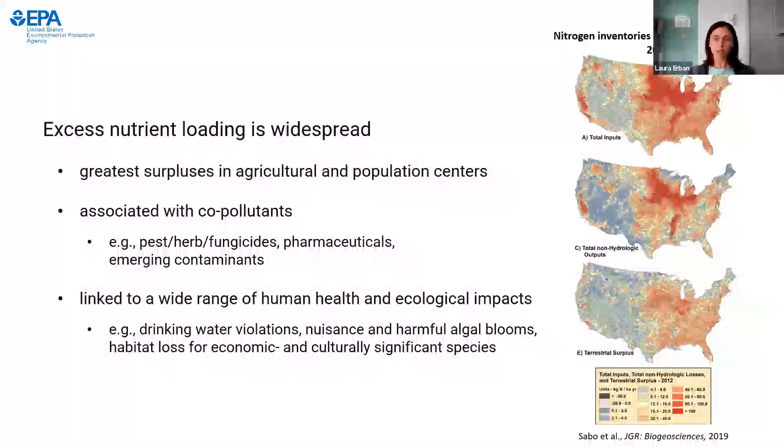And nitrogen alone, to say nothing of these other things, is linked to a wide range of human health and ecological impacts. So we have drinking water violations, nuisance and harmful algal blooms, and habitat loss over time for economic and culturally significant species. And nitrate in particular is a form of nitrogen that moves easily in groundwater. It's a regulated drinking water contaminant. We have a maximum contaminant level of 10 milligrams per liter nitrate as nitrogen.

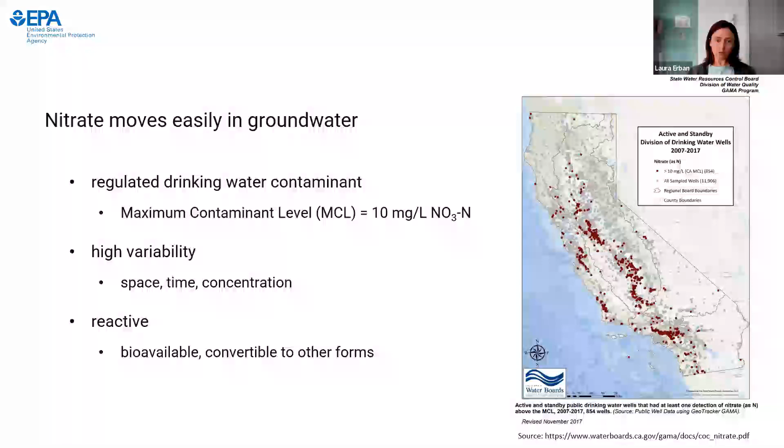And nitrate is a form that moves easily, if slowly, in groundwater to receptors. So from any given recharge area where we're applying nitrogen at the land surface, it is going to take days to more likely decades or even longer, centuries or millennia to discharge to streams, ponds, pumping wells, and the like, places that we would interact with it.

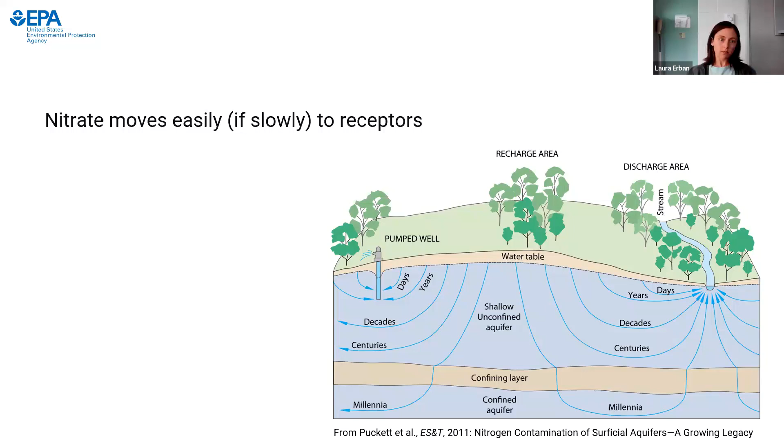And as a result of that slow leakage and also slow discharge through groundwater and also surface water and direct discharges, receiving waters become impaired by excess nutrients, along with other stressors that are contributing as well. And so we get these blooms of algae, that fertilization of the water bodies that reduces water clarity. It starves light to bottom species, including submerged aquatic vegetation. It basically overgrows, and it's unsightly, but in some cases also hazardous, where we have toxic algal blooms that can produce neuro and other toxins.

And in general, as these algal blooms die off, they also cause low dissolved oxygen events, fish kills, basically a wide range of impairments to water bodies that we want to use for a variety of reasons. So on Cape Cod, where we're working, and for those that aren't familiar, Cape Cod is on the eastern side of Massachusetts. From that national map you see here, it's the arm hanging off of Massachusetts. These waters are widely impaired by excess nutrients. And in this context, the overwhelming source is on-site wastewater treatment systems.

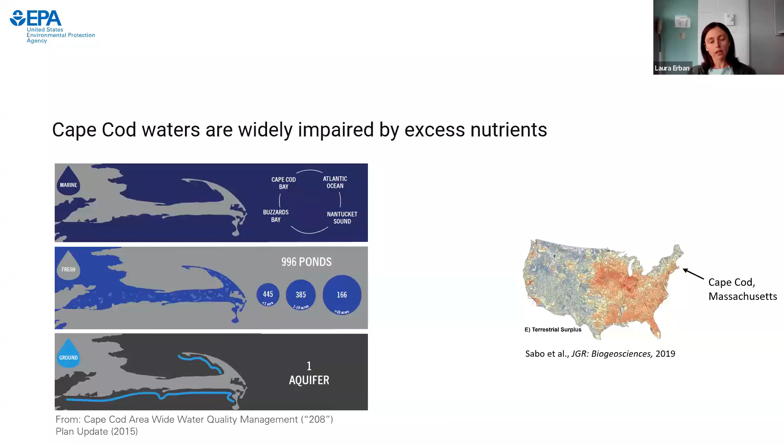And due to development density here, and it's a very popular place both year-round and particularly for the summer tourist season, those septic systems have contributed to widespread loading of a sole source aquifer, so the only source of drinking water supply, nearly 1,000 ponds and other water resources, including estuaries, so semi-enclosed saltwater embayments that don't flush very well, that receive this loading and become impaired by that chronic source.

And so on Cape Cod, there are now more than 30 estuaries with total maximum daily loads. This is a mechanism under the Clean Water Act Section 303(d) that allows for a determination of a pollution budget. So what is the pollutant of concern? In this case, it's nitrogen that's considered the limiting nutrient in estuaries. And what levels of loading would it take to sustain the ecosystem and the uses that we want to have for those water bodies.

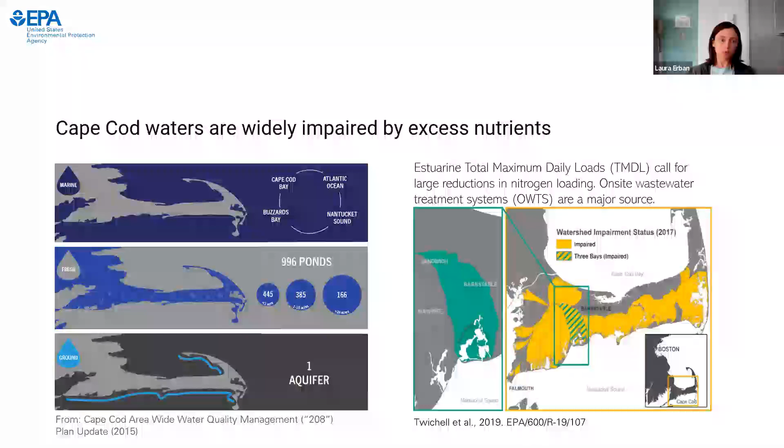And so these TMDLs specify load reductions, and they're generally speaking across the Cape saying about 80% of what we can control is from on-site wastewater treatment systems, and we need to knock that loading down Cape-wide by about 50%. But in some sub-watersheds, it's up to 100%. So we really need to reduce this loading. We've been working intensively in the 3 Bays watershed. That's sort of central Cape Cod. It's hatched in green here, working towards that TMDL.

And as specified under another section of the Clean Water Act, Section 208, there was area-wide water quality planning done Cape-wide to try to say, what are the ways that we can reduce this legacy and recurring nutrient loading? And so there's a lot of ways. This is showing you the tech matrix. So a range of things that we can do at different scales, things like extend sewers and provide some more centralized wastewater treatment, better septic systems, fertilizer management, land use planning and regulations. We can do things in water bodies through constructed wetlands or shellfish aquaculture or dredging and inlet widening.

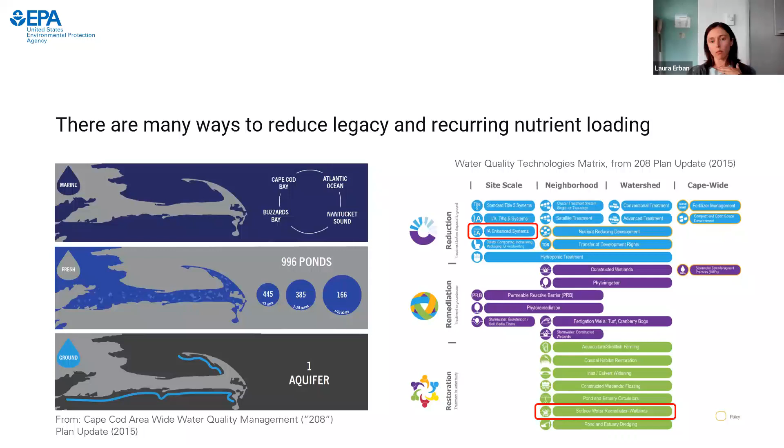There's the whole gamut of things that we can do to work on this from different angles, because that's what it's going to take at this point. And we determined that there were 2 particular areas that we could help move forward with that I'll be talking about today. So where did that come from?

We didn't come up with this research in the office, but went out to stakeholders and held a problem formulation workshop early on to say, what are the current needs and who can help us specify what the directions are to take at this time in terms of research and activities that we can work on in partnership. So through that stakeholder engagement process, we developed partnerships and projects. There are several threads to this work, but 2 that I'll speak about today are in the vein of enhancing on-site wastewater treatment and restoring cranberry farms to wetlands.

So zooming out for a moment to zoom back in, I want to paint a national portrait of on-site wastewater treatment, because the needs are much bigger than nitrogen removal. There's more than 1 in 5 US households using some form of on-site treatment and disposal. We last surveyed this nationally in 1990. There's greater reliance in the Northwest, Northeast, and Southeast. And as I said, it's a source of many different kinds of pollutants to groundwater.

There's a wide range of impacts for human and environmental health because of the variability in treatment technologies. We have in some areas just straight pipes running out to the backyard or a local creek. We have cesspools and cesspits that are more rudimentary, and then septic systems are an advancement, and beyond that, advanced or enhanced septic systems that can perform a higher level of treatment for nitrogen and potentially other things. But I just want to frame this as saying there's a wide range of things ranging from acute gastrointestinal concerns all the way to more chronic impairments that we see with nutrients.

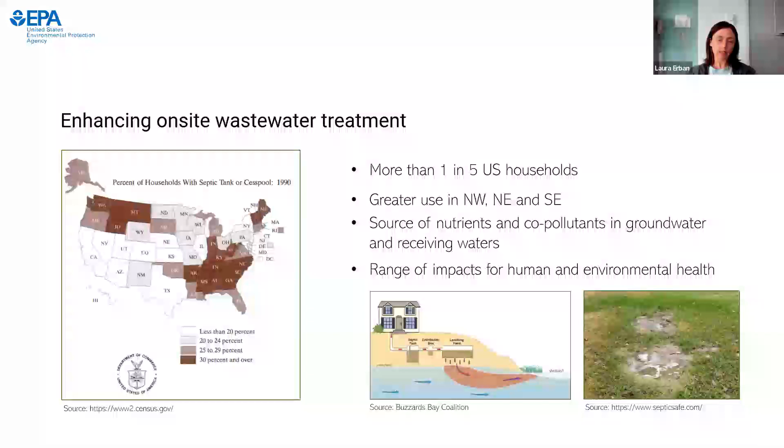So a conventional septic system, which is one of the more advanced in that spectrum I described, does a good job at settling solids and separating them in a septic tank, also fats, oils, and grease, but discharges liquid effluent to a soil treatment area or a leach field continuously. So there's a continuous wastewater flow path that's making its way to groundwater. And that flow path tends to be enriched in nitrate in that form that I mentioned before.

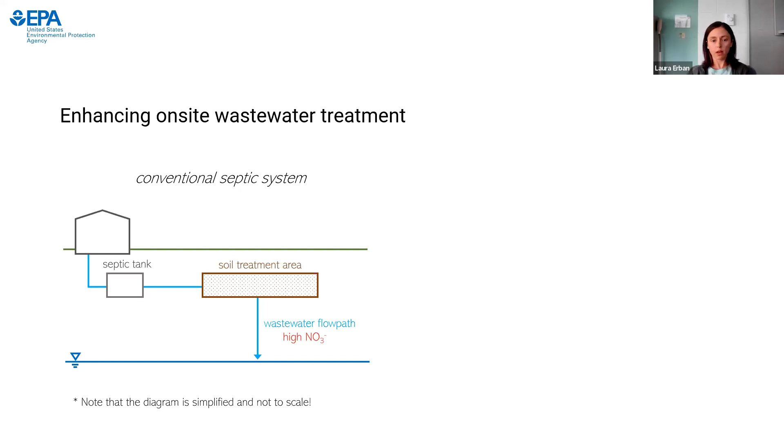And so the alternatives to discharging that nitrate to groundwater would be, broadly speaking, to separate waste streams. In particular toilet waste is where a lot of those nutrients are coming from. So we can do things like urine diversion, composting toilets, or tight tanks, which is just a tank that's not connected to a leach field. And we do see those types of alternatives in specific settings: our state beaches here, campgrounds, RVs, boats, seasonal homes, things of that nature. I won't be speaking more to these solutions, but I did want to highlight them.

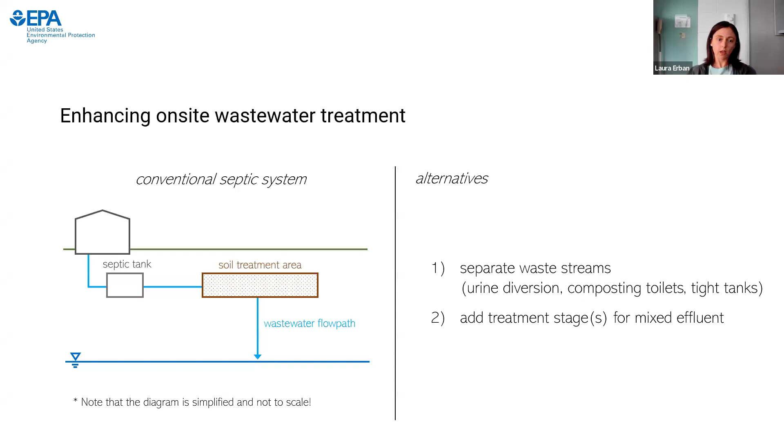The other alternative is to add a treatment stage for mixed effluent. So if you're not going to replumb your home, then what can we do to modify the down gradient treatment system? And in this case, that's because after leaving a conventional septic system, there are limited opportunities for a process called denitrification in the subsurface. So this is the final stage of a nitrogen cycle that will send nitrogen back to the atmosphere, diverting it from that effluent stream.

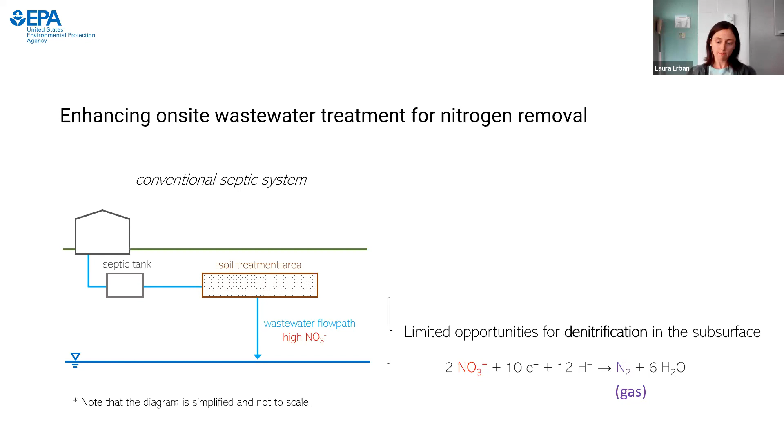And it's complicated. There are multiple steps. This is a simplification of a lot of microbial processes that are happening at small scale. There's diverse communities that need specific conditions to fully complete the cycle of taking the organic waste that we produce, turning them to inorganic forms by the process of nitrification, and then that final denitrification step. And at various stages of this, you need to have oxygen, exclude oxygen, have the appropriate supply of electron donors to accomplish this full cycle.

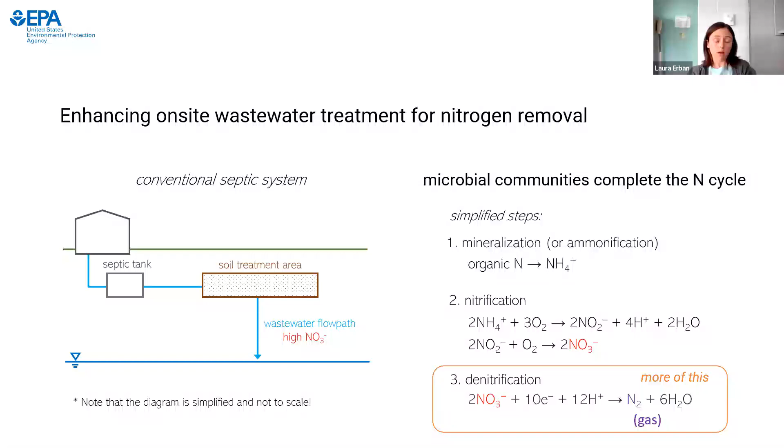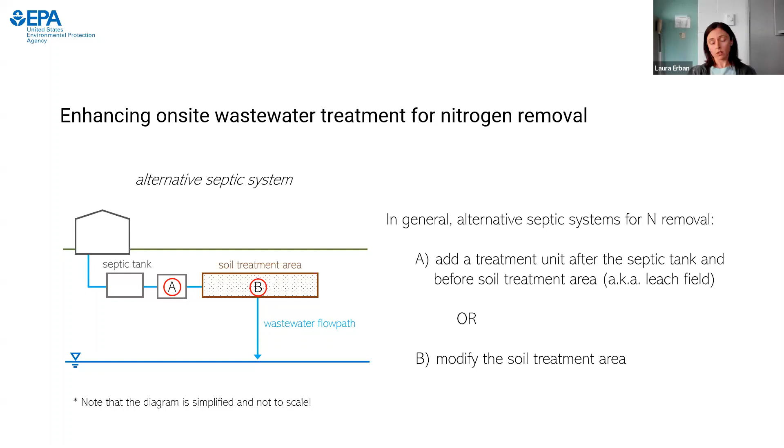So it's a multi-step process, and it's a little bit sensitive; we're relying on a microbial ecosystem to do this work, and they need the right conditions. And so in general, alternative septic systems that are designed for nitrogen removal supply these conditions by doing one of two main things. Again, generally speaking, they either add a treatment unit after the septic tank and before that leach field, so that's option A, or modify that soil treatment area in various ways, option B.

And there are many technologies out there that already exist to do that. And some do it quite well. There's variable performance, both in a test center setting, but also in the real world. When you get out there into actual homes that behave and have different user groups, there's variable performance in terms of cost and maintenance and aesthetics and things that people are willing to tolerate to use these things.

Variable approval and availability by state. So can you get them? Can you get them permitted and installed where you live? And then where you live determines what the best available approach is by your site. What's your lot layout? What's your depth to groundwater? There are many constraints. So there's a wide landscape of possibilities out here from which I'm going to drill down into what we're working on.

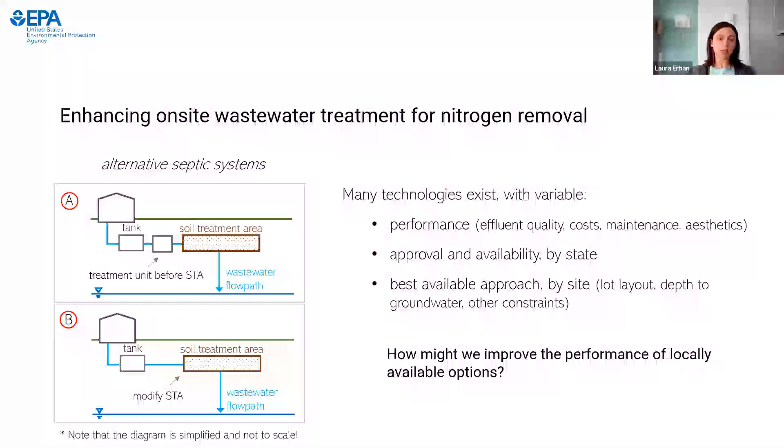And the question that's motivating this part of the work is how might we improve the performance of locally available options? So how can we make better options available to users in this context? It does get very context specific. And we know from prior work, in particular at the Massachusetts Alternative Septic System Test Center, which is a partner in this work, and also SUNY Stony Brook's Center for Clean Water Technology, and others, that adding a carbon source at the right stage of this treatment train, in particular a lignocellulosic carbon source, wood chips or sawdust, can really help provide a really high degree of nitrogen removal.

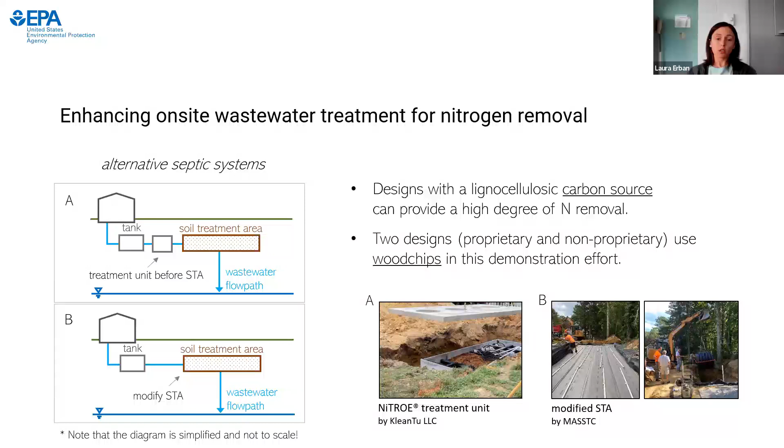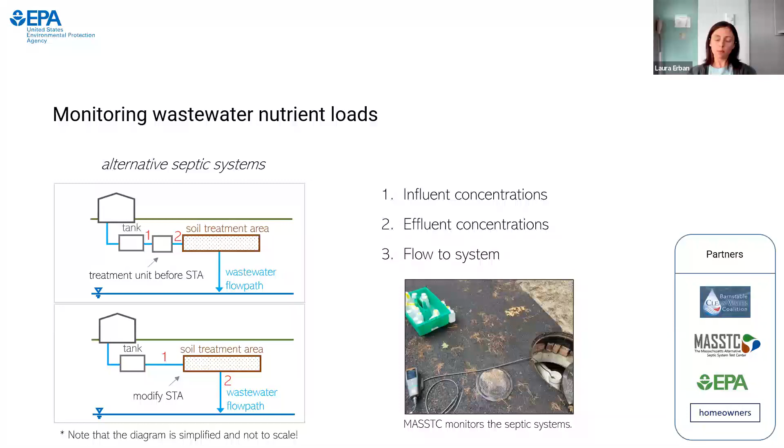And so we're working with, in this study, two designs. One's proprietary, the other's non-proprietary, that use wood chips in a demonstration effort on the Cape to try to move some forward for greater availability to users. So we're using a version of an option A and an option B that I described before. And we have these installed such that we're measuring influent and effluent concentrations on a monthly basis, so we can get at that reduction, as well as the flow to the system, so we can come up with total load numbers. And it's the MASSTC that is monitoring these systems on that basis.

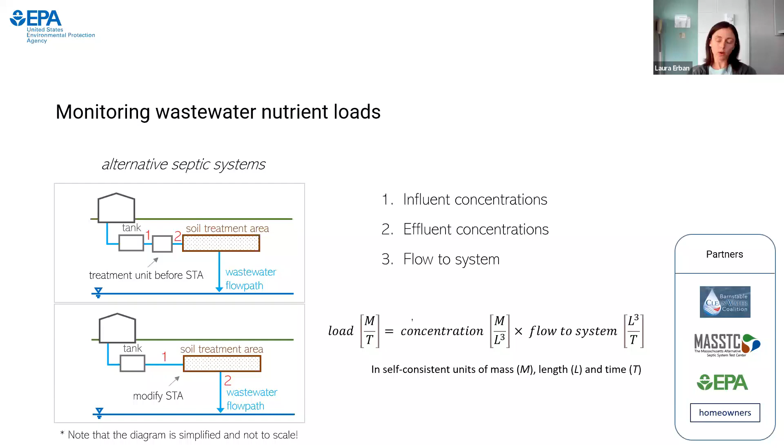And we want to get at loads because concentrations can be tricky, right? You can have a relatively low concentration output with high volume that's really producing a lot of mass to the environment. And ultimately, it's the mass that a water body receives, that loading, that mass over time, and what it can process that will determine those outcomes we're seeking to influence.

So we have now 13 enhanced septic systems installed in really close proximity. They're on about 1/4 to 1/2 acre lots, tightly clustered so that we can monitor both their individual and aggregate impact on groundwater quality. And we have a carefully designed groundwater monitoring network that we collaborated on with the U.S. Geological Survey's New England Water Science Center, who are key partners in this work as well, to both set up the demonstration, know where the groundwater is going, know where we could collect samples that would be representative of the system, and monitor for change over time.

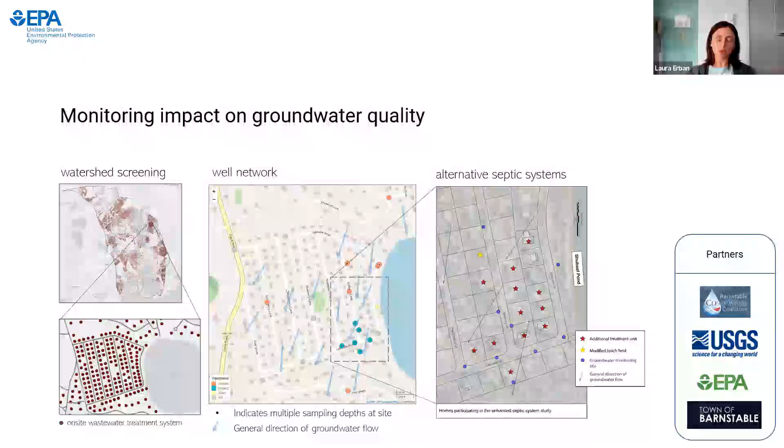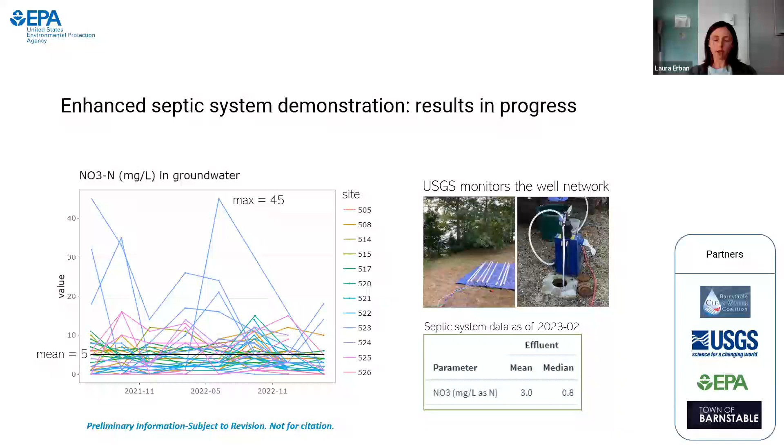And so, as I mentioned, we've set this up so that we have control and impact sites. Impact being the area where we've intensively deployed these septics and are hoping to see an impact of enhanced treatment, as well as surrounding areas that are unsewered, that are of similar housing density and comparable to monitor.

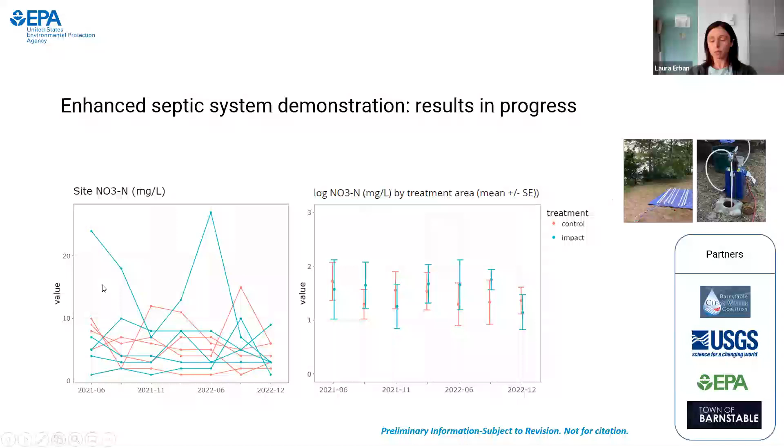As of the time that I'm showing you now, because of the transport time between the leach fields and the monitoring wells, we're not expecting to see big changes yet, but we are continuing to collect this data quarterly and hope to see that we've substantially reduced groundwater nitrate in particular, and we're monitoring other parameters as well.

And the reason that is significant is that through wetland restoration, wetlands can do all those processes that I mentioned with respect to the nitrogen cycle, and wetlands serve as receptors of large volumes of groundwater discharge. So from hundreds of homes, they're receiving that. They're low spots in the landscape that are weeping groundwater, intercepting those loads, and offer the opportunity to expose them to more favorable conditions for treatment. And they have the potential to operate on a much larger scale.

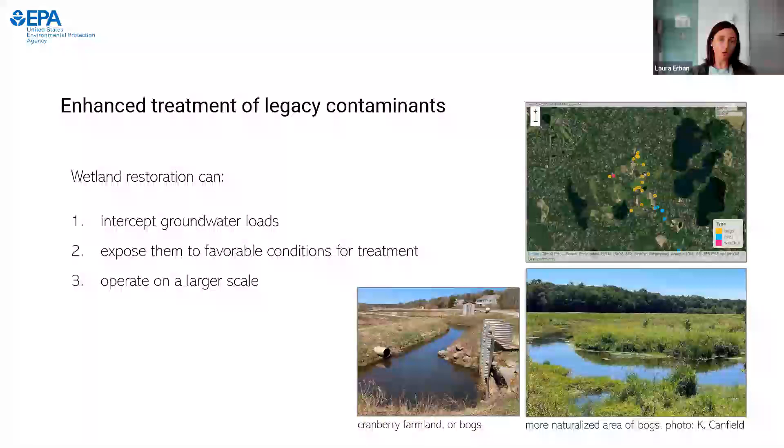So we could really knock a lot of that loading down, perhaps more quickly. And so the restoration objectives and working with an even larger group of partners, as you can imagine, as you scale these things, have even more folks involved in critical ways.

So we're seeking to reduce downstream nitrogen loads through creating self-sustaining wetlands. So low maintenance wetland features that can also renew ecosystems that are of cultural significance. And we work with the members of the Mashpee Wampanoag tribe to bring in species and assemblages of species that

are significant to them. There's also an opportunity for enhanced fish passage, so a rerouted herring run that will go through this restoration, opportunities for passive recreation, walking, wildlife observation, and really learning among project partners about how we do this work even better.

So, to get a little bit into the weeds of what we have here, we have a complex system. It's a natural and highly modified agriculturally operating system. We have lots of baseline data and a large body of research on treatment wetlands in general that have been built in many contexts for exactly this purpose. And we have a lot of uncertainty, right? So the question animating this work is how might we design, anticipate, and monitor for pollutant load reduction, because all of those features are really important to getting this work done and knowing that we did it.

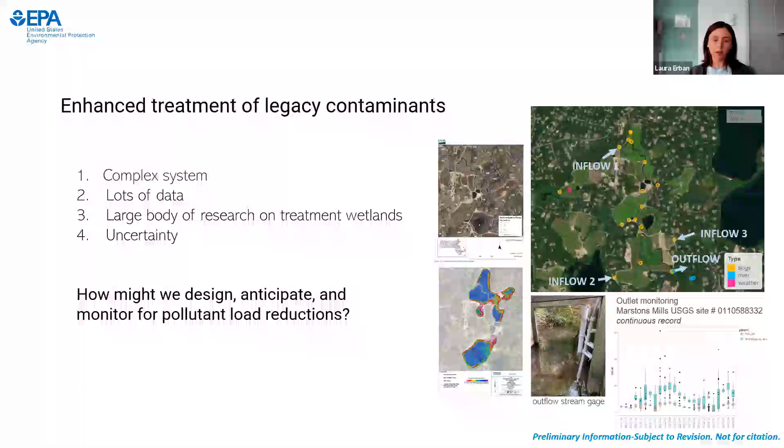So the process in terms of designing for nitrogen load reductions that we're working on is, again, to enhance that denitrification. And we're going to do that through greater contact of nitrate-enriched water with wetland soils. So I sometimes, perhaps too cavalierly, refer to the septics as wetlands in a box.

They're not as charismatic as these systems, which have birds and fish and people and have a lot of other co-benefits, but they are receiving, as wetlands are receiving, a lot of that nitrate-enriched water from those septic systems.

And if we can expose it to more surface area that's wetland, not those elevated surfaces and channels, but really let it have contact with the microbial communities that exist in the soils and have time to sit and process, then we have a greater chance of off-gassing that nitrogen at the site.

And so we have nitrate coming in here at about 2 milligrams per liter as nitrogen. We have other inflows from ponds that are less enriched in nitrate. We have outflow that's going out at 1 mg per liter because it's been diluted and attenuated to some extent, but we have an opportunity to knock that down much lower.

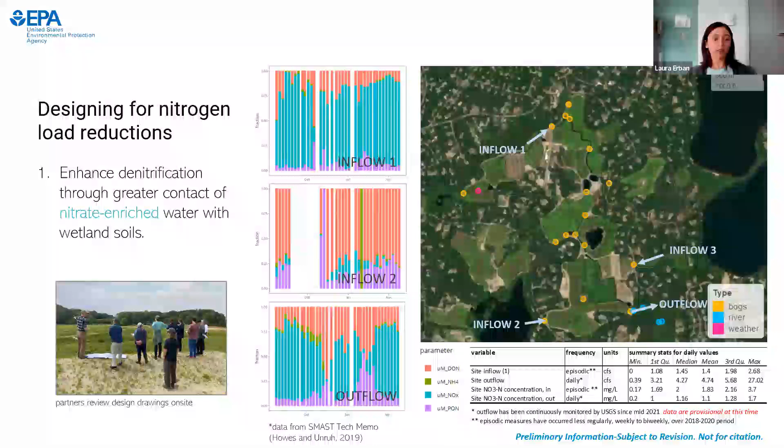And what we know in terms of designing, and we work very closely with these design partners. You can see them on site in the left picture here, who are working to actually do the engineering work and construction to get this done. Their design principles need to be, as I said, enhancing denitrification through greater contact with wetland soils.

And we know this from prior work to be an areal process. We need to spread that water on as much wet area as we can. It's most dependent on nitrate concentrations, the hydraulic loading rate, so that's the flow that you're passing through a system divided by the wetted area that you can give it, and temperature. So this process is temperature dependent as well because microbes slow down like we all do in the winter.

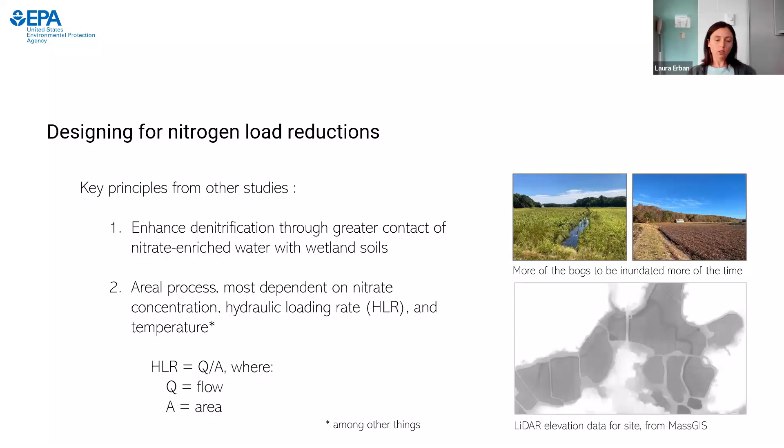And so the key for anybody thinking about applying this in a different setting is, does your site have nitrate flowing through it? And what are your opportunities to wet up a wetland surface? The best references that I have for anticipating nitrogen load reductions in this context, so that is to say, are you designing a wetland for mitigation of non-point source nitrate pollution?

I've turned to Kadlec's book on treatment wetlands. This is a great resource, over 1,000 pages, lots of consideration for the complexities across different sites and contexts. He also has a paper on constructed marshes for nitrate removal. And then Crumpton and co-authors' paper on water quality performance of wetlands receiving non-point source nitrogen loads. So that's for anyone who would like to do a dive into that literature.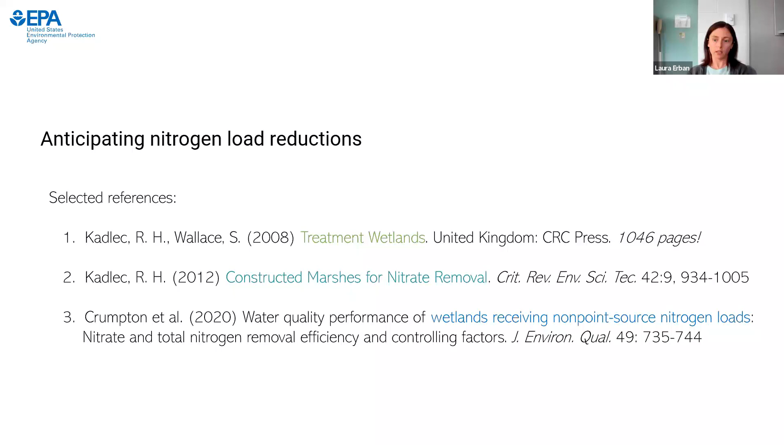And I really, in particular, like the figures from Crumpton and co-authors where they have modeled data from a number of wetland restoration sites in Iowa to try to give you a handle on these design parameters and where we need to be in terms of our hydraulic loading rates, how quickly we're moving water through the site, what nitrogen removal efficiencies can we expect? It's highly variable, right? At any given loading rate, you can have a factor of 2 difference in removal efficiency. And this matters to stakeholders that are considering pursuing this work.

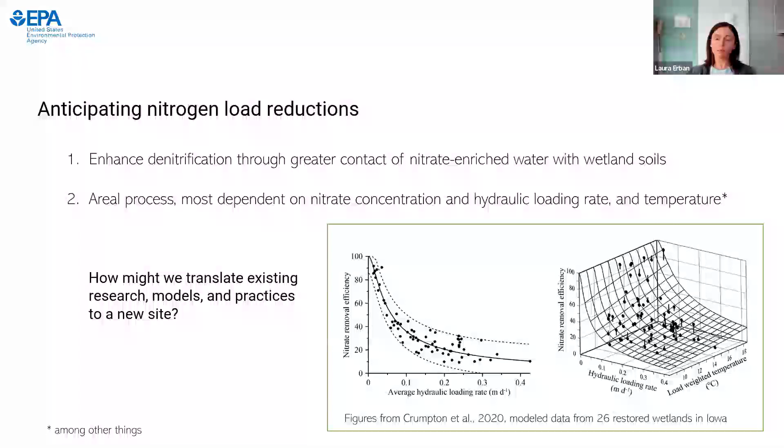And so a key question here is, how do we translate? We have a ton of research and models and practices that are already out there. How do we bring that to a new site and all of its special characteristics? So what we're working to do at this site for that key objective of reducing downstream nitrogen loads are, for step 1, we have determined that we are intercepting nitrate-enriched groundwater. We know that about 70% of the water flowing out of the site is from groundwater. And we know that it's thousands of kilograms of nitrogen that are flowing off of it.

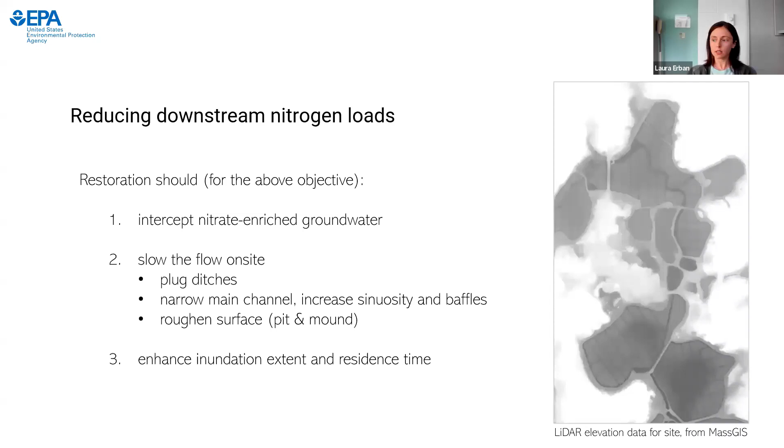What we seek to do is to slow the flow on site. So we're going to plug those ditches, narrow that main channel, increase the sinuosity and the baffles the water experiences, slow the flow, and make it stay here longer in this treatment environment. Roughen the surface through pit and mounds. Really just try to reduce short circuits as much as possible in order to enhance inundation extent and residence time at this site.

Again, with our partners at USGS, we're monitoring the outflow. We have a USGS stream gauge and a nitrate sensor there, as well as approximately monthly grab sampling for other parameters to inform what the loads are currently, and then continue this monitoring through and after restoration to say what difference was made. And so we see that we have higher loads in colder months. So that's going to be a fundamental constraint. That's tough. It would be nicer if we got all the loading in the nice warm months when the microbes are most active.

We additionally have other constraints of what we can do with water levels with respect to adjacent parcels. There's going to be continued farming adjacent to this restoration and other users. And we also have to consider other pollutants, right? When we re-wet a cranberry bog, we're particularly aware that phosphorus release can happen. When we change the redox conditions, which is what we're seeking to do, both in the septics and here, we have the potential to operate on other pollutants as well. And then, of course, the expense, right? It's not trivial to come in and do all this design work and to perform the restoration itself.

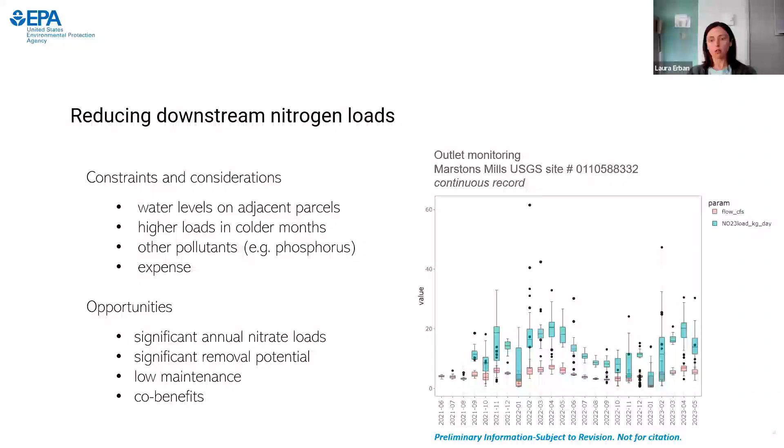We also have significant opportunities here. So in addition to that nitrate load reduction and the scale that a site like this can achieve, there's the potential for relatively low maintenance for this treatment operation. If we can get it up and running, it's to some degree self-sufficient. And then those other co-benefits that I mentioned for recreators and for cultural significance and general enjoyment of this place, and the learning that we derive from it that can be applied to other sites throughout New England and other contexts.

And so a question that comes up a lot from many stakeholders is, what about other pollutants? So we have this mechanism through the TMDL process that's driving us towards nitrogen reductions, but we know there are other pollutants that we're concerned about, phosphorus among them. Stakeholders are worried about PFAS. They're worried about a wide range of other contaminants that they know or are hearing more about.

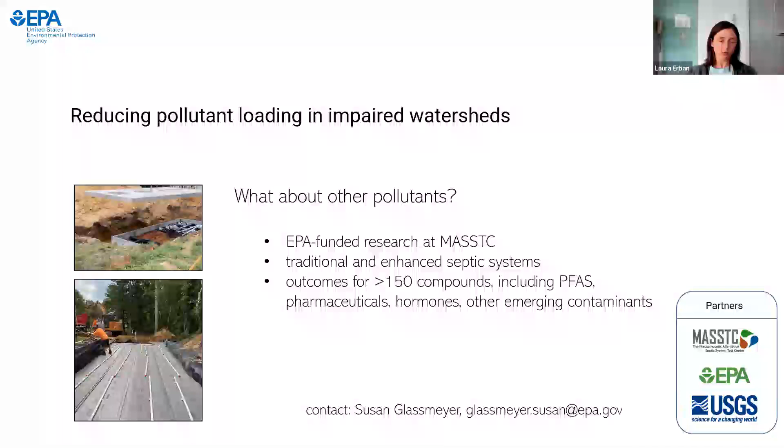We're mindful of that. My colleague Susan Glassmeyer within EPA's Office of Research and Development has been sampling our wells for a wide range of emerging contaminants, over 150 compounds, which includes many of the things I mentioned earlier. And she's also doing work at MASSTC on the septic systems that we're working with and other forms of traditional enhanced models to look at CECs coming in and out of those as well. So I can connect you with Susan if those studies, also very much in progress, are of interest.

And another question that we field a lot is, what about changes in loading, right? So as we're doing this work, I think we can't just change one thing, right? There's other conditions that are changing in the watershed. There may be new development. There may be changes in existing land use.

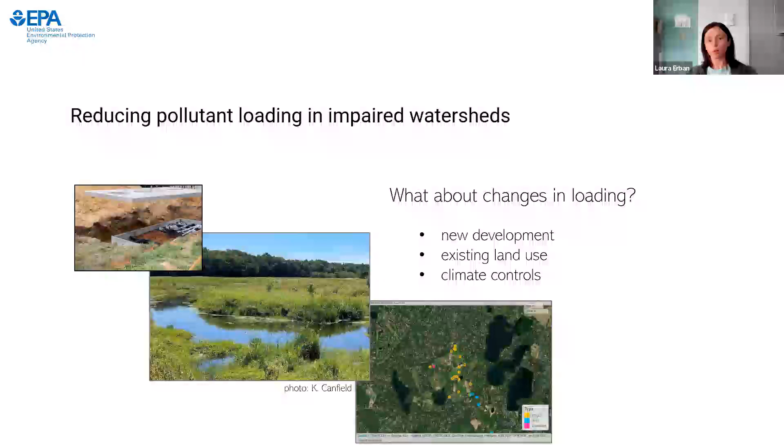The number of people in a house, where people are living and spending their time has changed in the pandemic. There may be other changes that are going on in the landscape, as well as more broadly climate change. So, what's happening with precipitation in and around the site and changes in groundwater flow to the site that are driven by that. We can't control the changes in loading that are happening externally, but we do need to be mindful of them and try to control them in our experimental and data collections.

And so I'm going to move towards closing up here and say that the solutions that I'm talking about really exist in this broader context that I brought up earlier. There's definitely more than two. There's a wide range even within the two that I talked about of different variations on those two. We do need to be mindful of the total mass of pollutants from all the different sources and how those are changing, and not get overly focused on concentrations or any one source when we could be overlooking other important pieces of this.

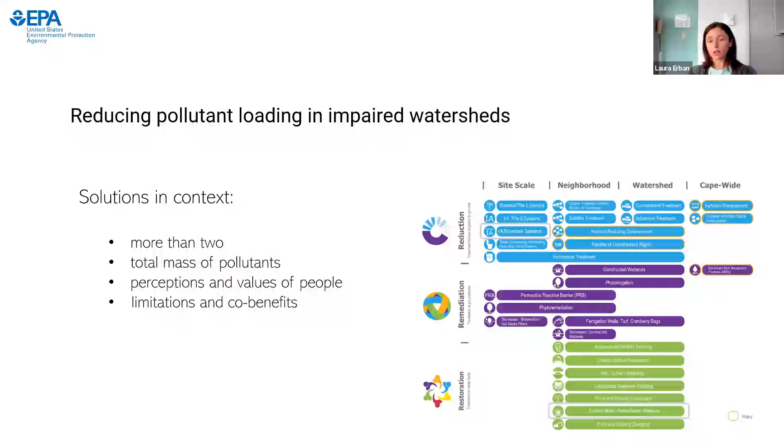And beyond just the technical and environmental dimensions of this, we really have to be mindful of perceptions and values of people, because there are no solutions that people won't use or implement. I've spoken a little bit to limitations and co-benefits, but it's really key in evaluating any of these solutions to this problem that we clearly articulate, identify, and be mindful of those throughout, because these solutions do exist at contexts that range from site-specific to watershed scale and regional scale.

So I'll close to reiterate that once these groundwater systems become contaminated, it's really, really tricky. It's really tough, and it requires us to stay focused, engaged, and collaborative in our approaches if we seek to remedy this issue.